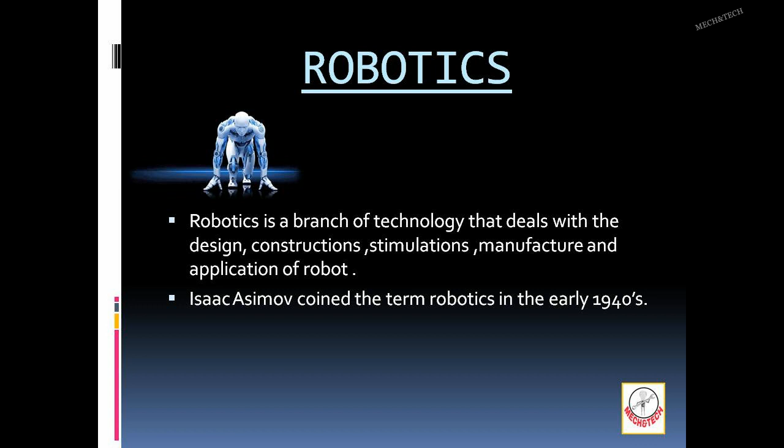I will give you a short introduction about robotics. So what is meant by robotics? Robotics is a branch of technology that deals with the design, construction, simulation, manufacture and application of robots. The term robotics was first introduced by Isaac Asimov in the early 1940s.

Next we are going to see the history of robot. The word robot came from robota, which means hard work. The term robot was first used by a writer, Karel Capek, in a 1921 play called RUR.

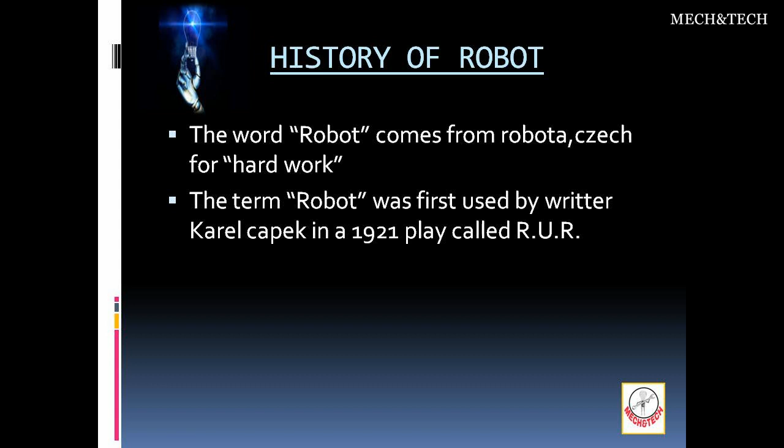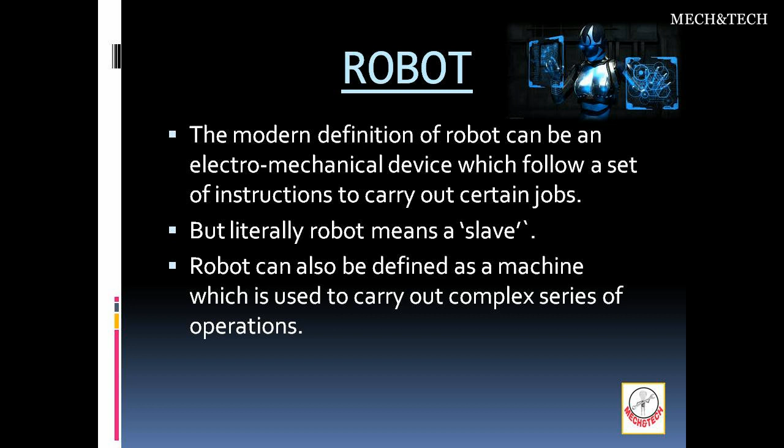So what is meant by a robot? The modern definition of robot can be an electromechanical device which follows a set of instructions to carry out certain jobs. But literally robot means a slave. Robot can also be defined as a machine which is used to carry out complex series of operations.

Laws of robotics. Robotics was introduced by Isaac Asimov, a famous science fiction author. The laws are taken from the Handbook of Robotics, 56th edition, 2058 AD.

The first law of robotics: a robot may not injure a human being or, through inaction, allow a human being to come to harm.

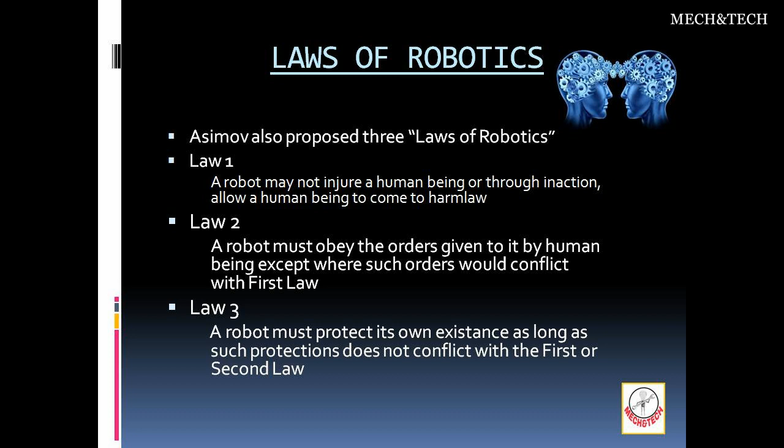Second law: a robot must obey the orders given it by human beings, except where such orders would conflict with the first law. A robot must protect its own existence as long as such protection does not conflict with the first or second law.

Working. What is the process behind the working of a robot? A robot is a machine that gathers information about its environment using sensors and uses that information for processing to follow instructions and do work. So the input information is collected using sensors and processed to produce output.

It also includes three main parts for its work: the sensing part, the thinking or processing part, and the acting part. The sensing part provides input to the robot through sensors or an input program. The thinking or processing part is a microcontroller. Next is the acting part, which could involve lights, motors, actuators, sounds, etc.

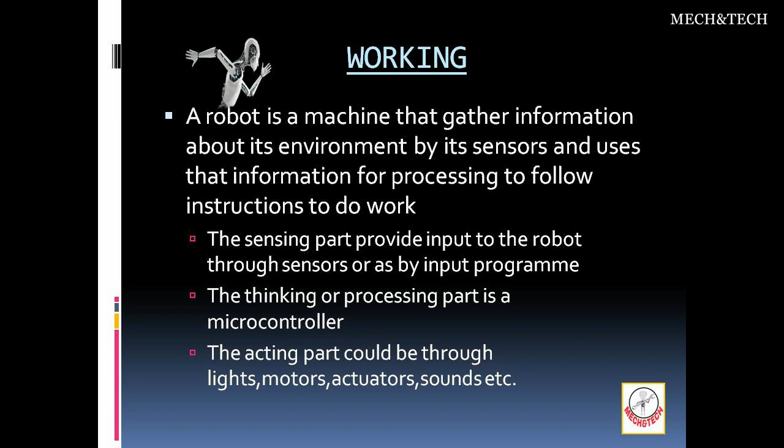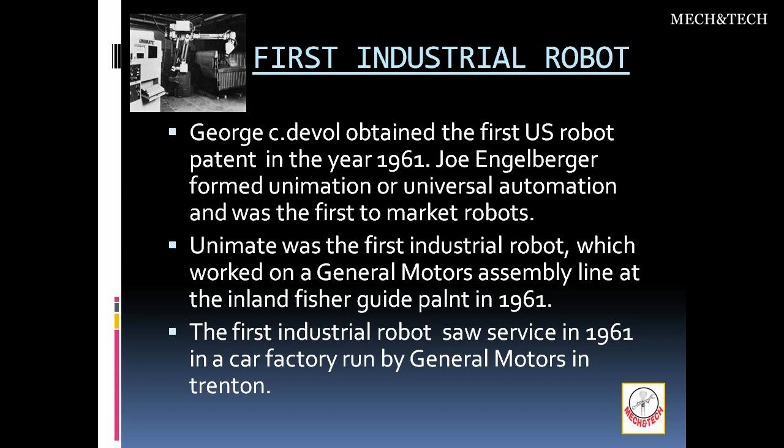First industrial robot: George C. Devol obtained the first US robot patent in 1961. Joe Engelberger formed Unimation, or Universal Automation, and was the first to market robots. Unimate was the first industrial robot, which worked on a General Motors assembly line at the Inland Fisher Guide plant in 1961. The first industrial robot went into service in 1961 in a car factory run by General Motors in Trenton.

Robot: Shakey was the first general-purpose mobile robot. Shakey was developed at the Artificial Intelligence Center of Stanford Research Institute, endowed with a limited ability to see and model its environment, and was controlled by a computer. This means it was programmed using a computer nearby it.

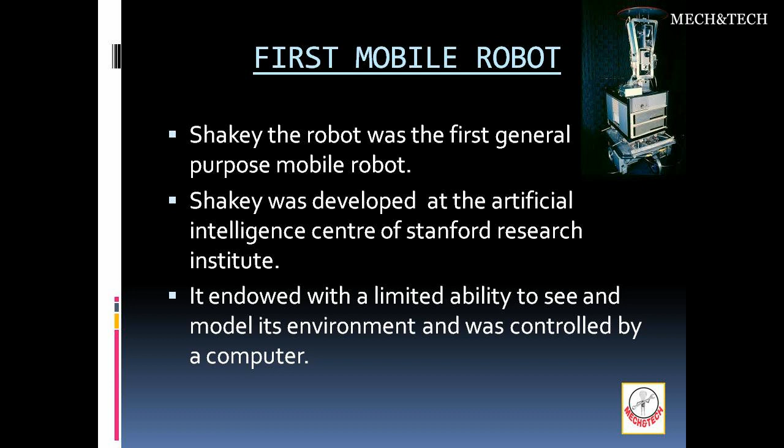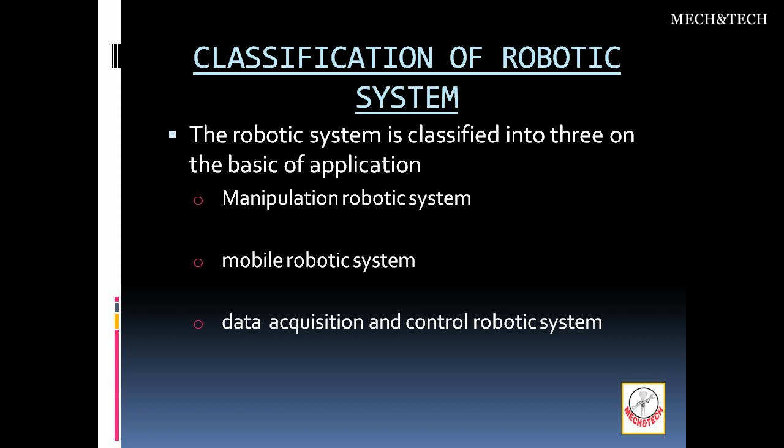Classification of robotic systems: the robotic system is classified into three types based on application. The first is the manipulation robotic system, the second is the mobile robotic system, and the third is the data acquisition and control robotic system.

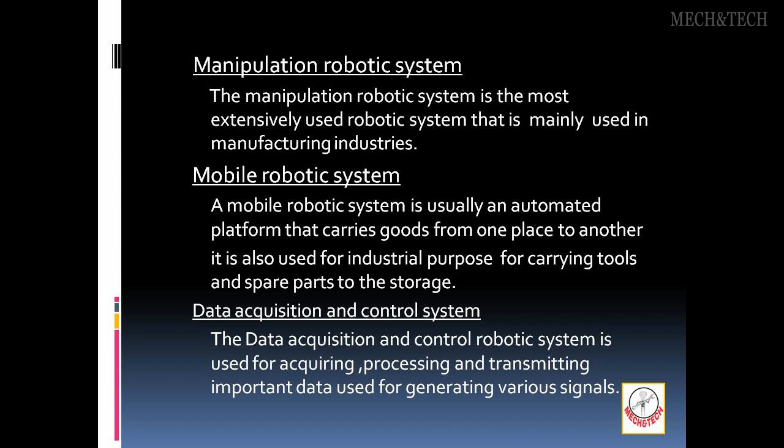Manipulation robotic system: this is the most extensively used robotic system, mainly used in manufacturing industries. Second, the mobile robotic system is usually an automated platform that carries goods from one place to another. It is also used for industrial purposes, carrying tools and spare parts to storage.

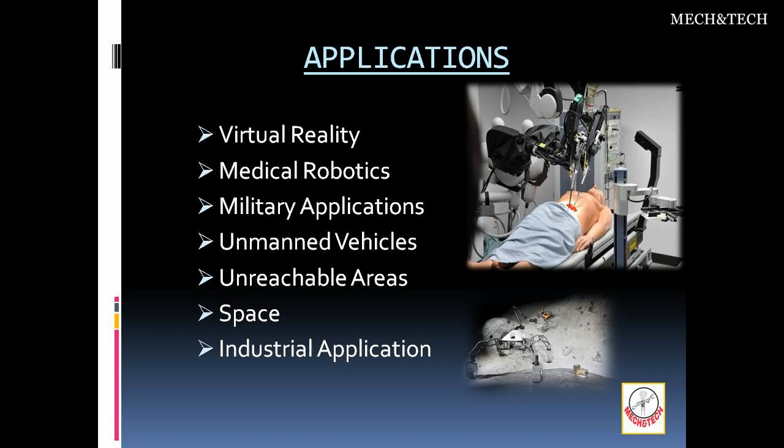Robots are used in different fields because of their performance and accuracy in doing work, such as virtual reality, medical robotics, military applications, unmanned vehicles, unreachable areas, space, industrial applications, and so on.